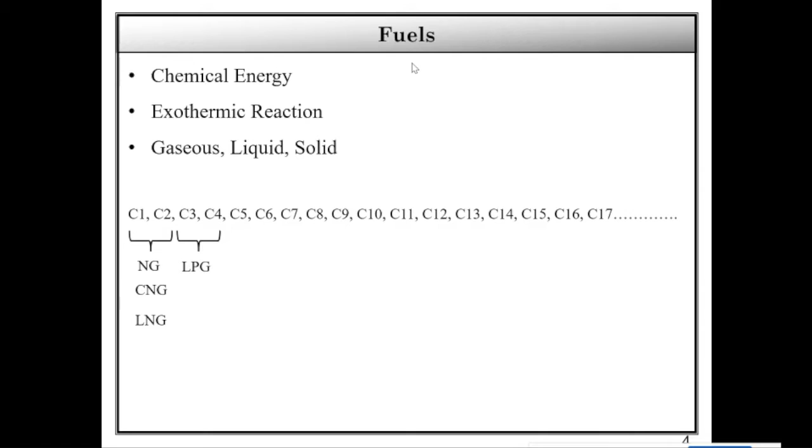C3 and C4 are easier to compress. Basically, it consumes less energy to convert into liquid form. And this C3 and C4 is popularly known as LPG, liquid petroleum gas, what we use at our houses.

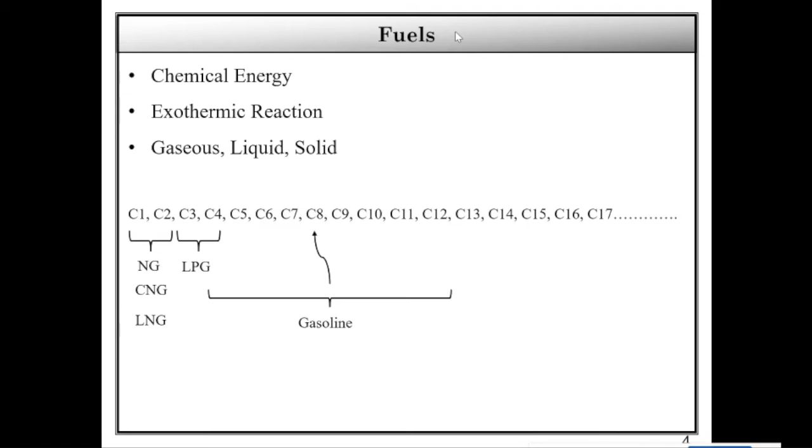And then gasoline. What is gasoline? Gasoline is basically the mixture of C5 to C12. Whatever liquid components are there from the hydrocarbon, this low molecular weight liquid component, these are basically the mixture. Majority of this gasoline consists of C7 and C8. Similarly, diesel and kerosene is the mixture of C10 and beyond.

However, the maximum portion of the diesel consists of C12, and kerosene consists of C10. So, in a nutshell, what I wanted to explain with this slide is that gasoline and diesel are not one single hydrocarbon. These fuels are basically mixtures of several different hydrocarbons. So it means these will not have a single boiling point. They have a varying boiling point depending on the composition.

So if somebody is producing this gasoline from an oil well in India, it may have some different composition. If you are importing gasoline from Saudi Arabia, that gasoline may have a different composition. So it is like that. There is no single boiling point for diesel and gasoline. It is basically the boiling range, which varies depending on the composition of the compounds.

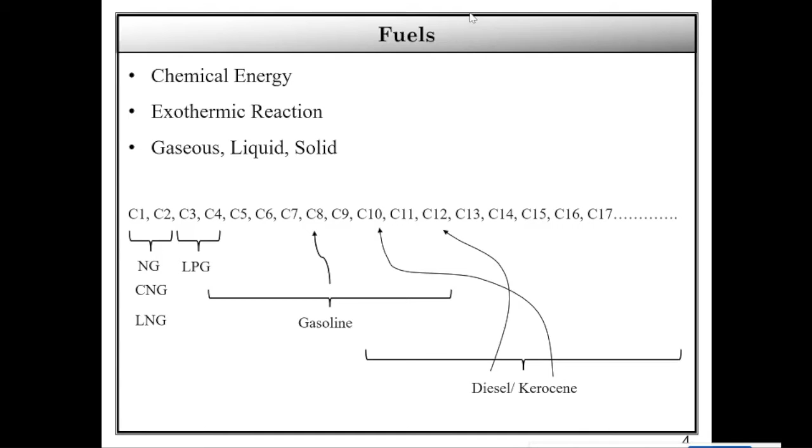Now I will quickly come to the diesel and gasoline engine. I hope most of you have already gone through diesel and gasoline engine combustion. So why do these two different engines come into the picture? Why can't we use just one engine, diesel or gasoline? Why do we need two different types of engines? This is mainly because of the different types of fuel.

Gasoline has two very important properties. One is the vaporization characteristics. Gasoline vaporizes very easily, and also its auto-ignition temperature is higher. Diesel, on the other hand, has very poor vaporization characteristics, and its auto-ignition temperature is lower. And therefore, gasoline fuel is very easily mixed with the air.

And therefore we observe that normally in the gasoline engine the fuel-air mixture preparation happens outside the combustion chamber, and in the diesel engine the fuel-air mixture preparation happens inside the combustion chamber. This is mainly because of the inherent property of the fuel. That is the main reason for adopting these two different technologies.

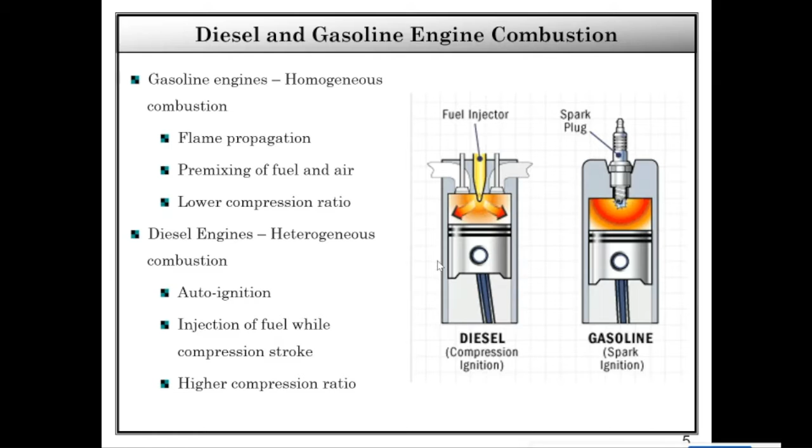In the gasoline engine, the combustion happens through the flame propagation phenomenon, and in the diesel engine, the combustion happens through the auto ignition phenomenon. In a gasoline engine, there is a source of ignition. In a diesel engine, there is no source of ignition. So the ignition happens due to auto ignition.

Okay, 4-stroke engine. This also you must have gone through earlier. When we call it a 4-stroke engine, it means the piston is basically traveling 4 times from TDC to BDC. In the 4-stroke SI engine, in the first diagram, number 4 is basically the fuel injector. It is a low pressure injector, and it is injecting the gasoline fuel before the combustion chamber. What happens is the fuel comes here at point 4, it mixes with the air, and the mixture enters into the combustion chamber.

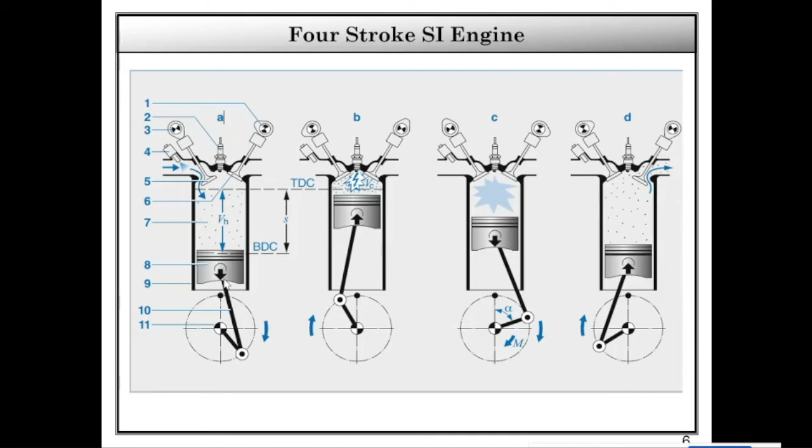Finally, the compression happens in the second diagram, the spark is initiated, and then the combustion starts. Flame propagation happens in that diagram. In the third diagram, the piston pushes down, the piston moves downward, and finally the exhaust stroke. I hope most of you are already aware of this 4-stroke SI engine. Similarly, how does the combustion basically happen in the SI engine and the CI engine?

On the top side of the slide there are two diagrams. One is showing the spark in the spark plug. That is the spark generation, and this spark generation basically acts as the initiation of the combustion phenomenon. Once this spark is generated, the ignition starts with the fuel-air mixture which is in proximity of this spark, and then this flame starts propagating towards the further portion of the combustion chamber. This is how the flame propagation phenomenon happens.

The second diagram does not belong to the SI engine. This belongs to the fuel injector. I am showing this because you should have some comparison between the SI and CI. In the SI engine, the left one shows the spark generation, and the combustion is happening because of the spark plug. On the right hand side, there is a fuel injector which injects the fuel in this manner, like a flower, and there are very small diesel fuel droplets spread over the combustion chamber. Due to the auto ignition temperature, it actually starts combustion.

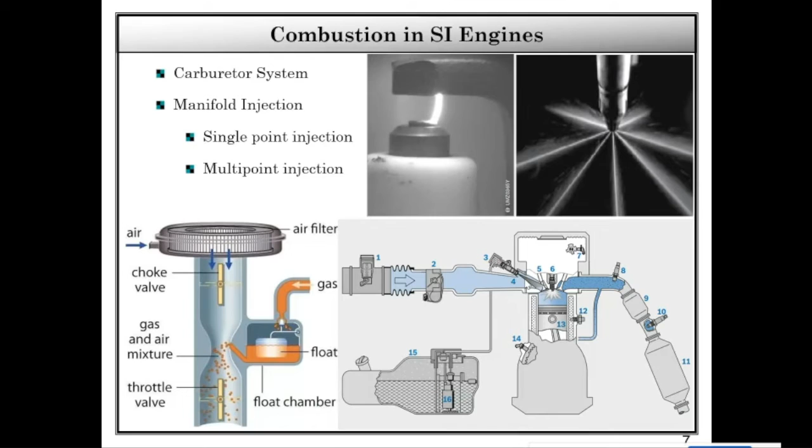Through this process, when the piston is about to reach the TDC position, auto ignition of the fuel happens, because the auto ignition temperature is lower for diesel fuel compared to gasoline fuel. So auto ignition happens quickly in diesel compared to gasoline. As soon as the auto ignition starts, the chemical energy of the fuel starts converting into thermal energy, and it is stored as thermal energy in the form of gases in the combustion chamber.

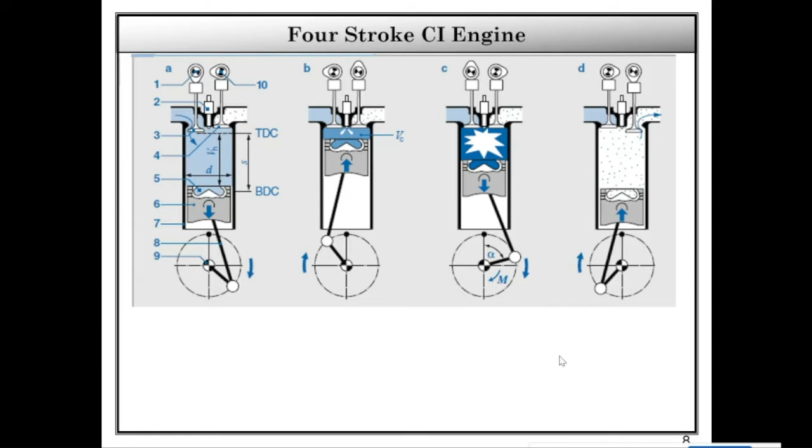Once this combustion happens, pressure develops inside the combustion chamber. It starts pushing the piston downward, and by this method the thermal energy is finally converted into the mechanical motion of the piston. This is how thermal energy is converted into mechanical energy. And finally, through the exhaust stroke, the combustion products escape the combustion chamber and it again comes back to the suction stroke.

So this is a representative diagram for the pressure trace. This diagram shows the 4-stroke pressure trace result, in which the blue block shows the suction stroke, TDC to BDC, the green block shows the compression stroke, the orange block shows the expansion stroke, and the yellow block shows the exhaust stroke. If you look at each of these strokes, you can see the pressure trace. The curve shows the in-cylinder pressure, how the pressure inside the combustion chamber varies.

You can also see where the start of injection is happening. Start of injection and start of combustion are both different phenomena. Start of injection means when you start injecting the fuel, and start of combustion is when the combustion starts. The time difference between the two phenomena is known as ignition delay. Sometimes we write it as ID also.

If you draw the corresponding heat release diagram, in the lower diagram you can see the typical heat release rate profile. The top diagram shows the pressure trace, meaning if you measure the in-cylinder pressure in the engine, this is the typical pressure trace, and the lower diagram shows the heat release rate. Whenever combustion of fuel happens inside the combustion chamber, it is not spontaneous. It takes some time, and there is a rate of heat release. The lower profile shows that rate of heat release. The heat release does not occur instantaneously; it takes some time, and therefore in terms of crank angle you can see there is a typical profile of this heat release rate.

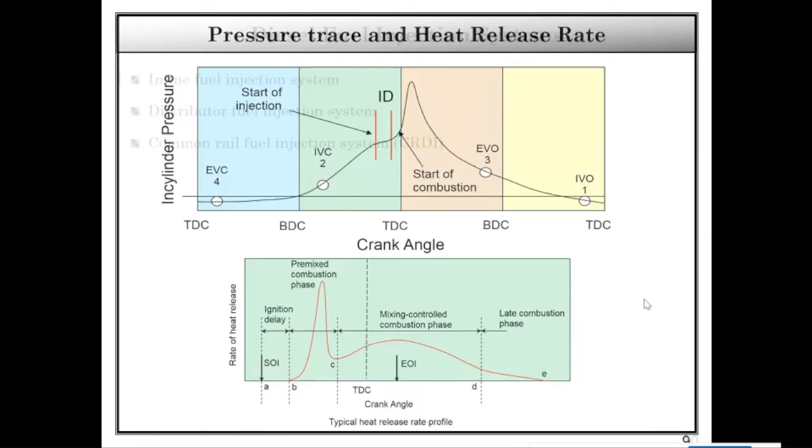So diesel. How does the diesel fuel injection system work? What are the different diesel fuel injection systems? One is the inline fuel injection system. The second one is the distributor fuel injection system. Until the 1990s, only these two types of fuel injection systems were famous: inline and distributor.

In the inline fuel injection system, you can see that there is a plunger and a cam. When the cam moves, this plunger moves up, and in this manner it compresses the fuel and opens the injector, and the fuel can be injected into the combustion chamber. Similarly, the distributor fuel system again has a plunger, but there are multiple cam arrangements. The size of the distributor fuel injection system is comparatively smaller than the inline fuel injection system. That is the only advantage. The other things, like the outlet fuel pressure, are the same in this case.

These two types, the inline and distributor fuel injection systems, were famous until Bharat Stage 3 norms, because manufacturers were able to fulfill the requirement up to Bharat Stage 3. However, beyond Bharat Stage 3, there are certain emission norms which have to be met, and therefore manufacturers have to adopt newer technology. So nowadays in any diesel engine satisfying Bharat Stage 4 or Bharat Stage 6 emission norms, you will observe they are equipped with a common rail fuel injection system, the CRDI system.

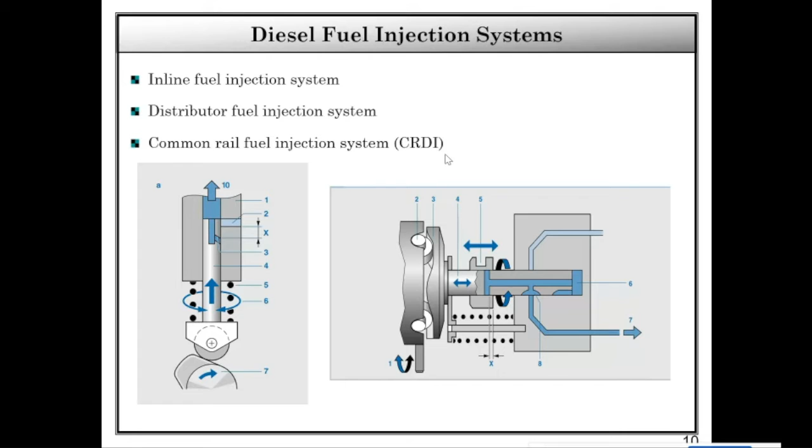The CRDI system is not a new technology. However, it is more costly and more sophisticated. Earlier it was not adopted because manufacturers wanted to reduce the overall cost of the vehicle, and the CRDI system is a little costlier and more complicated compared to the inline and distributor fuel systems. But nowadays every diesel manufacturer has to adopt the common rail fuel injection system because they have to meet the emission criteria. So what is the common rail fuel injection system?

You can see this layout, where there is a low pressure pump in the bottom-most corner. The low pressure pump, the fuel pump, is situated in the fuel tank of the vehicle. It sucks the fuel and sends it through the filter to the high pressure pump. There is a metering unit which meters the amount of fuel. The low pressure pump compresses the fuel to around 10 bar, and this 10 bar fuel is supplied to the high pressure pump, which compresses the fuel to about 1000 to 1500 bar.

And 1500 bar is too high. This is a very high pressure. For example, the air pressure we are sustaining over our heads is approximately 1 bar. So the high pressure pump generates approximately 1000 to 1500 bar, and nowadays some advanced CRDI systems generate fuel pressure up to 2000 bar also. This high pressure fuel goes to the

common rail. On the right hand side, you can see the common rail. In this common rail, 4 injectors are connected. Four or more injectors can be connected, and these individual injectors are normally connected to the engine cylinders. In this manner, there are 2 major advantages. One is that you are able to inject the fuel at much higher pressure. Beyond 1000 bar pressure, you are able to inject the fuel.

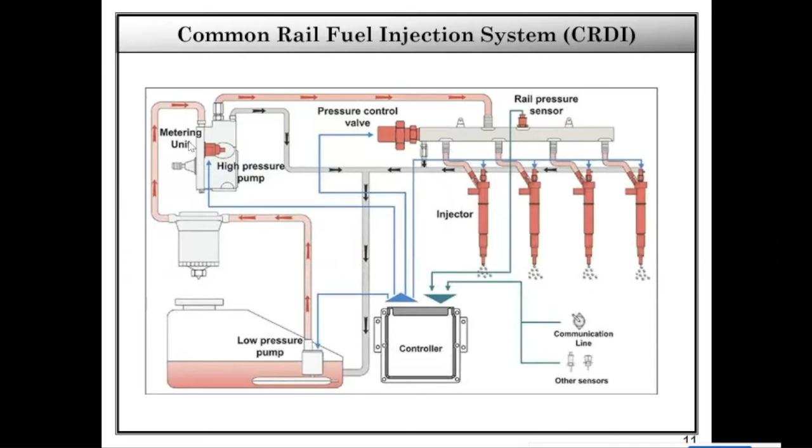Okay, now this high pressure pump, you have seen this high pressure pump in this diagram. How does this high pressure pump actually work? So you see on the left hand side, this basically shows a typical structure of the high pressure pump, and this model belongs to the Bosch high pressure pump. Bosch is a very well known firm for the manufacture of this common rail fuel injection system. So in this you see there is a cam type of lobe in the center, and there are three plungers surrounding it.

So this central lobe is basically eccentric to the center of the circle. Okay, so because of the eccentricity of this lobe, it actually pushes the piston while it rotates. And in this manner, the fuel compresses above the plunger, and the high pressure fuel can be delivered to the common rail.

And this diagram basically shows the common rail system, where you can see the two sensors, number 5 and number 2, and number 4 is basically the high pressure fuel, which is coming from this high pressure pump, which is shown above. Okay, so from this high pressure pump, the fuel is coming to number 4 in the lower diagram, and number 6 is going to the individual injectors in order to supply the fuel. Number 3 is basically the return line. The return line is provided because if some amount of excess fuel is there, it can be transferred back to the fuel tank.

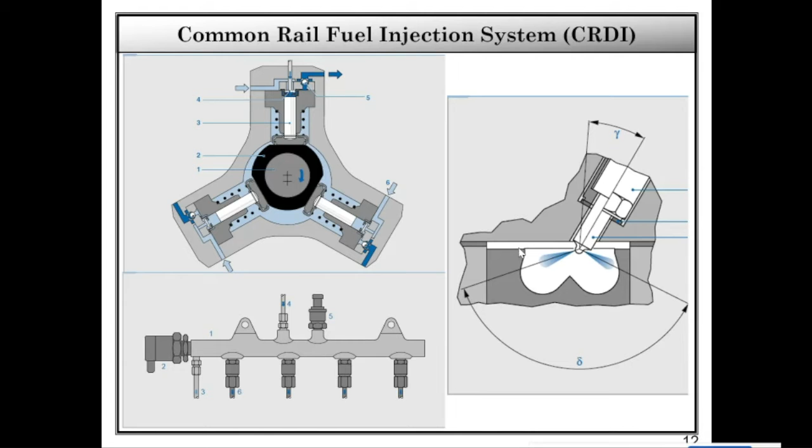Okay, so the fuel injector. How is the fuel injector installed inside the diesel engine? So you see there are various parameters by which we actually define the position of the fuel injector inside the combustion chamber. We can place the fuel injector at a certain angle, and there is also the fuel injection angle, which is called the fuel spray cone angle. So there are various parameters we need to define before installing the fuel injector inside the combustion chamber.

Okay, now nowadays the IC engine is not limited to mechanical devices only. You must be wondering that there are many components which are electronically controlled in the IC engine. It is not just the engine or some mechanical components. In the last 10 to 15 years, the IC engine has changed drastically, and it is basically controlled by an ECU, electronic control unit. So this electronic control unit is basically the brain of the IC engine, and it takes feedback from several sensors and gives commands to many actuators.

Okay, so an ECU is there in every vehicle. Whenever you open the bonnet of any car, some of you must have a car also, if you look inside the bonnet, you see that there are many mechanical components. But in addition to that, there are many sensors and many actuators. And in one of the corners there must be an ECU somewhere. The ECU is hidden somewhere, but there is always an ECU nowadays with BS6 norm vehicles. BS6 and BS4 vehicles always consist of this ECU, electronic control unit, and it is installed somewhere in the engine. So what is the function of this ECU?

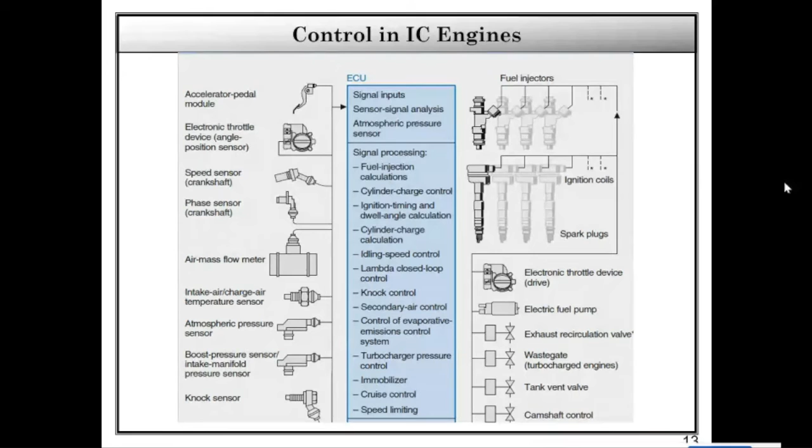Okay. So the electronic control unit is basically an IC circuit, and it acts like a brain for the IC engine nowadays. I can suggest some books for reading about the details of this. So ECU programming is one of the major tasks nowadays, because you have to feed the programming in order to the number of tests you conduct in the IC engine.

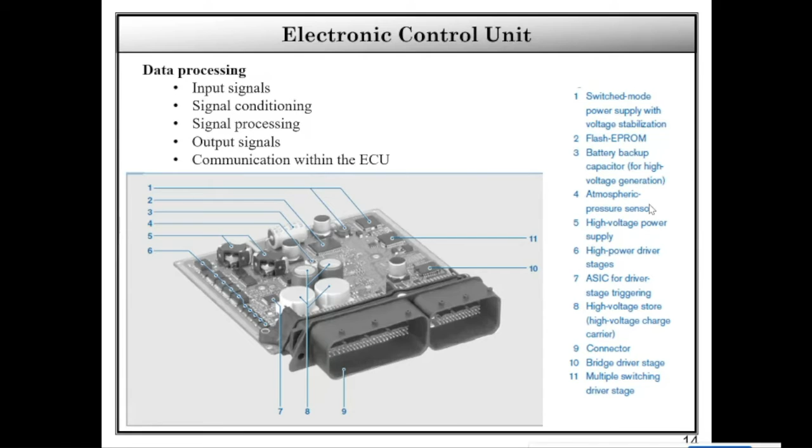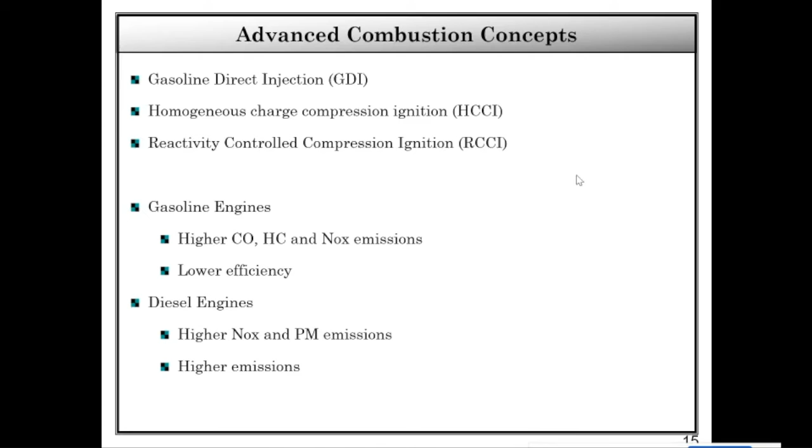So gasoline direct injection is basically a method where you inject the gasoline directly into the combustion chamber. As I explained, in the carburetor or manifold system, you basically inject the gasoline fuel in the manifold, or you mix it in the carburetor. Okay, and then the mixture enters the combustion chamber. But in gasoline direct injection, a high pressure gasoline injector is installed in the combustion chamber itself. Okay, and only air enters the combustion chamber, and the gasoline is injected inside the combustion chamber.

So there are two modes of this gasoline direct injection. One is the homogeneous combustion process, and the second one is the stratified charge combustion process. Homogeneous combustion process means, in a conventional SI engine, the fuel air ratio has to be maintained at the stoichiometric ratio. Okay, I mean, if you do not have a proper ratio of fuel and air in the SI engine, the combustion cannot start, because of the low concentration of gasoline in the combustion chamber.

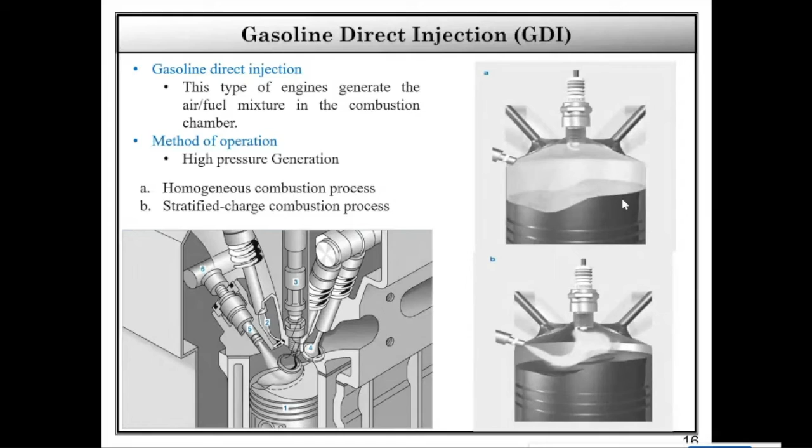Okay, however, in gasoline direct injection, the fuel air ratio is actually lower. Okay, so whatever fuel is required for the required power production, only that amount of fuel is injected in gasoline direct injection. So the homogeneous charge combustion system is one of the techniques in the GDI system where fuel is injected with a lower fuel air ratio, but in a homogeneous manner throughout the combustion chamber.

While in the stratified charge combustion process, the fuel is injected in a certain direction. In the lower diagram, you can see the fuel is injected in a certain direction, and because of the specific piston design, you can see there is a deflector in the piston which is directing the fuel which is injected. Okay, that fuel is directed right towards the spark plug. So when it is directed towards the spark plug, the space closer to the spark plug is full of fuel. Okay, that is rich in fuel. So the combustion starts there.

Okay. However, when the flame propagation starts in a later stage of the piston movement, the amount of fuel is less. So in this manner, you generate most of the power when it is required, and towards the end of the piston movement, less power is produced. Okay. So in this manner, the GDI engine is very beneficial for fuel economy. Okay, so this basically acts like a diesel engine also.

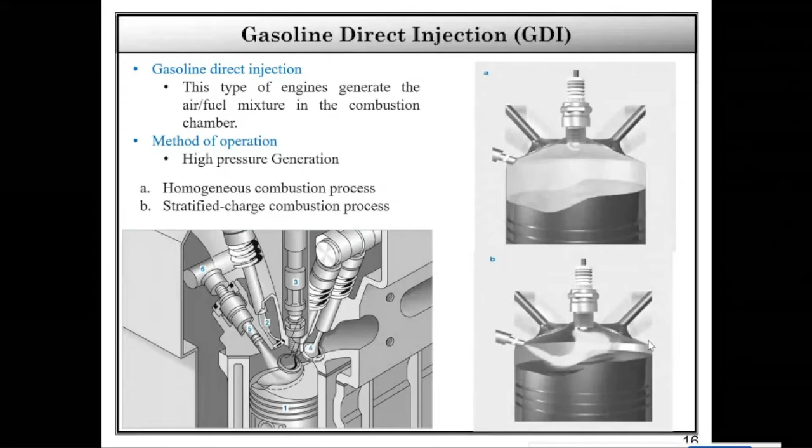Stratified charge. Strata means layers. In this stratified charge combustion, you inject the fuel in such a manner that layers of different fuel concentration form inside the combustion chamber, so the useful power can be maximized.

Similarly, homogeneous charge compression ignition. In the gasoline engine, like I explained, flame propagation happens. In the diesel engine, the fuel injection happens and due to auto ignition, the combustion happens. However, in the HCCI engine, it is a very low temperature combustion phenomenon, and you inject the fuel before it enters the combustion chamber, but at a relatively higher compression ratio. In this manner, the combustion is more homogeneous.

The only problem with the HCCI engine is that sometimes you need high load conditions. This is one of the limitations: the HCCI engine cannot be operated at higher engine load conditions. It is very good for low and medium load conditions, but for higher load conditions it is not very suitable, and that research is still going on.

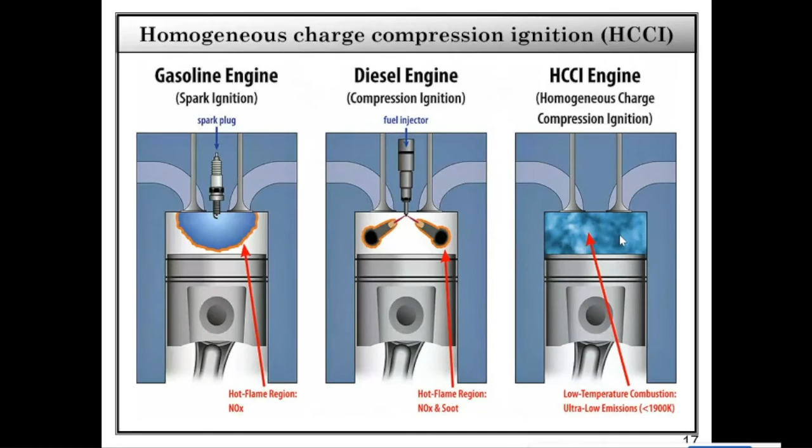Diesel is infamous for particulate and NOx emissions. However, gasoline combustion is very good and is only infamous for HC emissions. The particulate control is very difficult, but the gaseous control is relatively easier. The diesel engine generated particulate is very harmful and sometimes difficult to control. However, the gasoline engine generates HC, CO, and NOx, which are relatively easier to control because they are in gaseous form, and there are devices available to control those emissions.

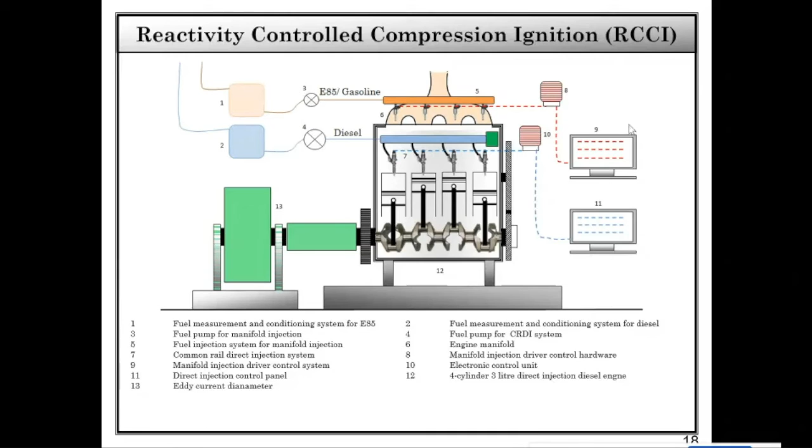So reactivity controlled combustion is basically the combination of these two concepts. Sometimes we also call it dual fuel injection, where you are injecting two different types of fuels. In a conventional diesel engine, whatever fuel injection system is there, that is there. But in addition to that, we install another fuel injection system in the manifold for gasoline-like fuels. By having the proper ratio of these two fuels, we can optimize the emission level in the tailpipe, and the combustion phenomena can also be optimized. That is one of the research areas nowadays, and people are still working on this solution.

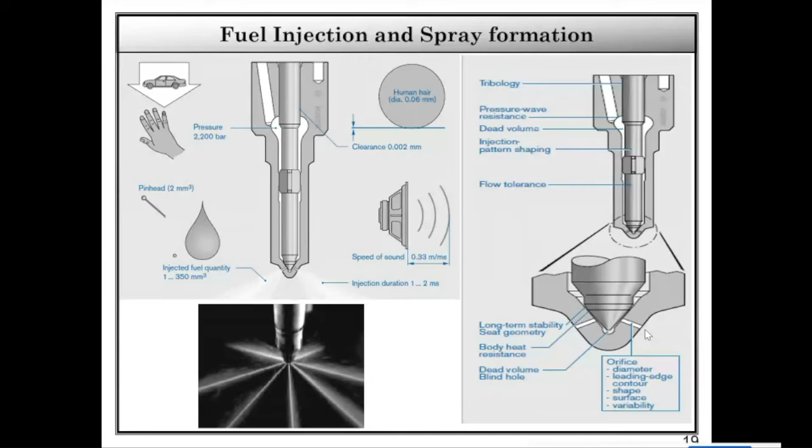On the right hand side, you can see the zoomed figure of the injector nozzle, where you can see the orifice. Sometimes we call it the injector nozzle and orifice; both are the same. The orifice diameter is in the range of microns. The smaller the orifice, the more the droplet size is minimized, and that is better for mixing. So injector design is a very important phenomenon, and people do research in this area also.

Okay, now pollutant formation and after treatment devices. So you see, basically there are two techniques. I have maybe 10-15 minutes more. So till now I explained what the different combustion phenomena are in brief, and how pollution reduction and optimized combustion can be achieved by adopting these techniques.

Okay, one of the important points in the discussion we had till this point is that it basically indicates the control of emission through in-cylinder modification. Like you want to modify the combustion phenomena, or modify the injector, or have an advanced fuel injection system like the common rail fuel injection system. By adopting all those techniques, you are having some kind of control by modifying the engine devices, in or around the combustion chamber, and this gives you some control over the emission.

However, there are other things. As a result of the combustion, there is still a lot of pollutant that comes into the tailpipe, like hydrocarbon emission, CO emission, NOx emission, and particulate emission. These are the main pollutant components. Even with in-cylinder control techniques, we still need some kind of control in the tailpipe, and therefore we install some kind of devices in the tailpipe. These devices are known as after treatment devices.

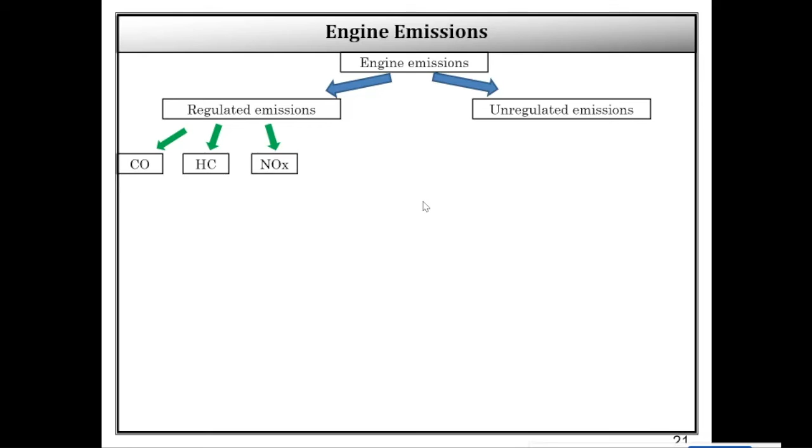Regarding engine emissions, you can see that they are basically divided into two different categories. One is the regulated emissions, and the second is the unregulated emissions. Regulated emissions consist of CO, HC, NOx, and PM. CO means carbon monoxide, HC means hydrocarbon, NOx means oxides of nitrogen, and PM means particulate matter. This particulate matter can further be divided into elemental carbon, organic carbon, trace metals, sulfates, nitrates, etc.

Out of this, the organic carbon and the trace metals are well known as carcinogenic, and they cause diseases like cancer. So these are not very good for health. Therefore there are certain emission regulations in order to limit CO, HC, NOx, and PM, so the emission can be minimized. This is basically the purpose of having the Bharat Stage norms.

Apart from this regulated emission, there are many unregulated emissions also, which mainly come from HC and OC, hydrocarbon and organic carbon, because hydrocarbon is not a single compound; it is a mixture of different hydrocarbons. Similarly, organic carbon is also a mixture of several different hydrocarbons. So this also acts as unregulated emission, and this basically results in benzene, toluene, xylene, polyaromatic hydrocarbons, methane, saturated and unsaturated hydrocarbons, aldehydes, and alcohols, etc. These are very harmful and toxic to human beings, and have to be controlled. However, there is no regulation to control these compounds individually till now.

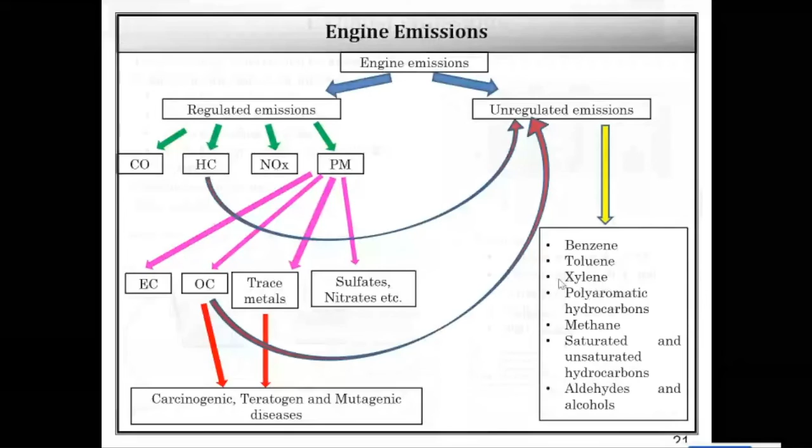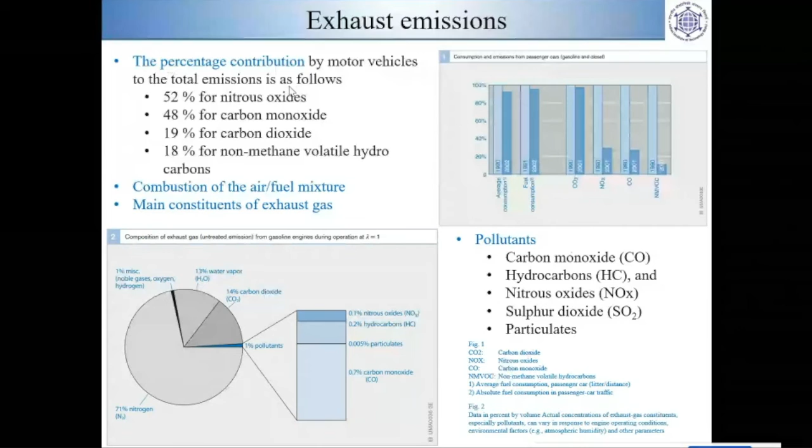Exhaust emissions: these are some of the data available on the internet about the contribution of the automobile sector in the total emission, and how the pollutant formation happens. Here in the diesel engine, you can see there are sprays, so there is a fuel rich region and a fuel lean region. In the rich region there is deficiency of oxygen, and in the lean region there is deficiency of fuel, between the two sprays. So the combustion is not homogeneous. When the combustion is happening, it basically happens where the proper fuel air mixture is available.

So it is not homogeneous combustion; it is basically heterogeneous combustion. In contrast, in an SI engine it is homogeneous combustion because the fuel-air mixture is homogeneous there. That is why we call diesel combustion heterogeneous combustion, because the combustion is not happening homogeneously throughout the combustion chamber. It depends on the local fuel-air ratio inside the combustion chamber.

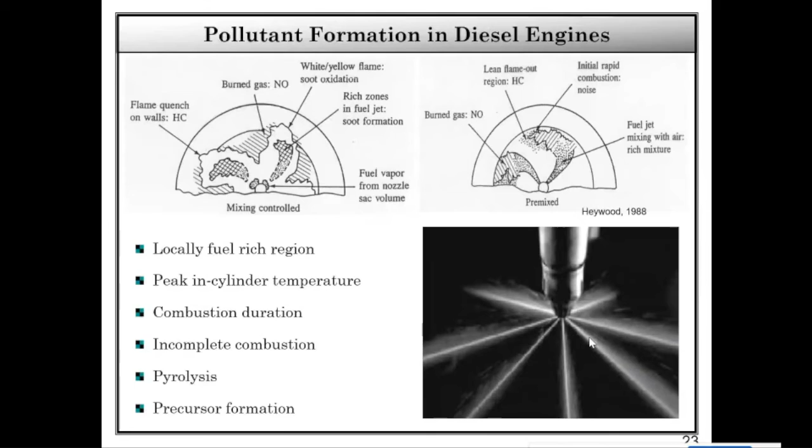Pollutant formation. NOx formation is happening mainly because of three reasons: thermal NOx, fuel NOx, and prompt NOx. Thermal NOx: whenever air enters the combustion chamber, nitrogen is inherently present with the air. This nitrogen starts reacting with the oxygen at very high temperature inside the combustion chamber, and they eventually form NO and NO2. And this is basically the NOx emission.

Some of the NOx emission forms due to impurities of nitrogen present in the fuel, and some of the NOx forms due to the cyanide radical route during the flame propagation, or mostly during the flame propagation. So this prompt NOx is mainly dominating in gasoline combustion.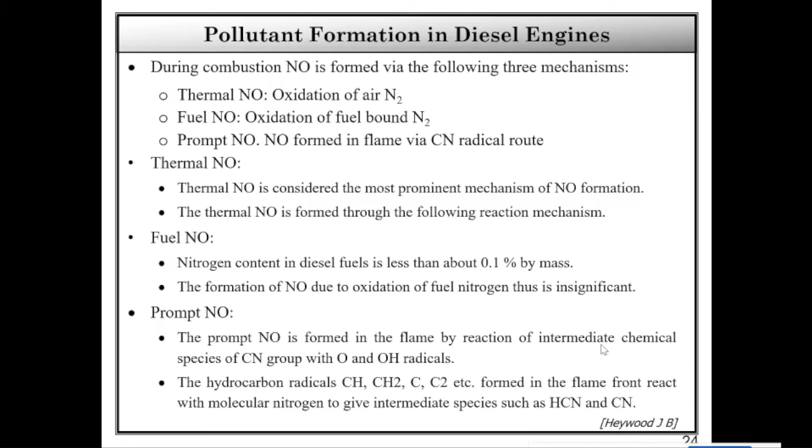So how does the formation of this diesel particulate happen? Diesel particulate is one of the major problems related to the diesel engine. Whatever black smoke you see coming out of the tailpipe, this black smoke is not gases. These are very tiny particles which are suspended in the exhaust. Whatever gaseous emissions are coming, you cannot see that. What you are seeing, the black smoke, are very tiny particles. Those are called diesel particles, and these particles are very harmful to human beings.

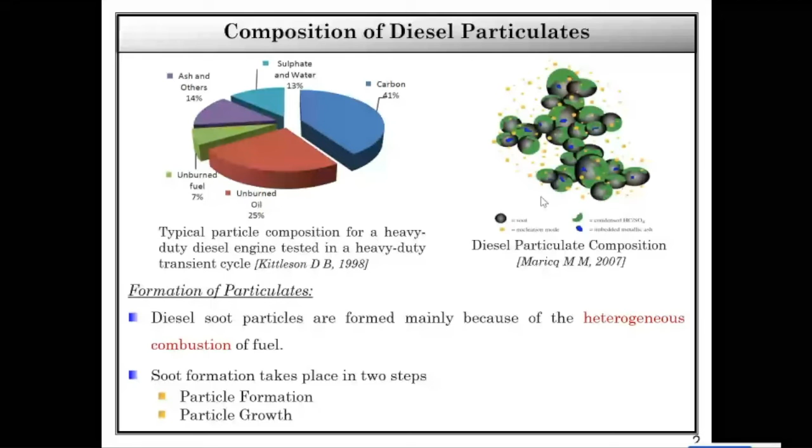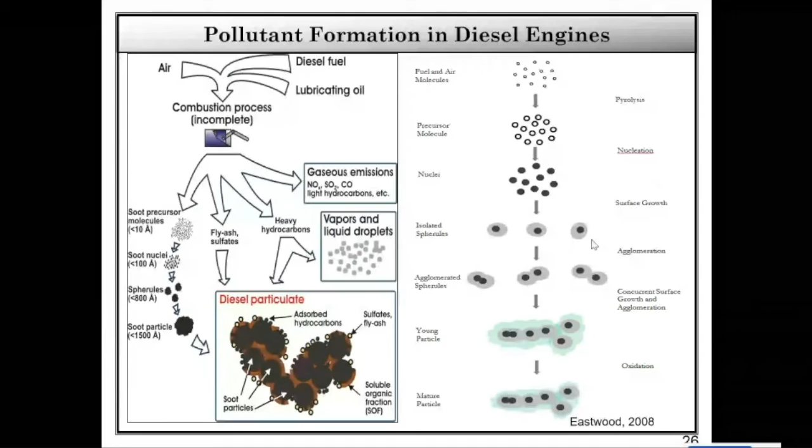This is the structure of these particles. They are very small, in nanometers, and because of their very small size they suspend in the air and make the color of the exhaust black. These particulates can be filtered out by some devices. How does the formation of diesel particulate take place? There is a certain procedure inside the combustion chamber: pyrolysis happens, followed by nucleation, then surface growth, agglomeration, and finally oxidation. So the mature particle can be formed inside the combustion chamber, and the whole diesel particulate phenomenon takes place in a few milliseconds.

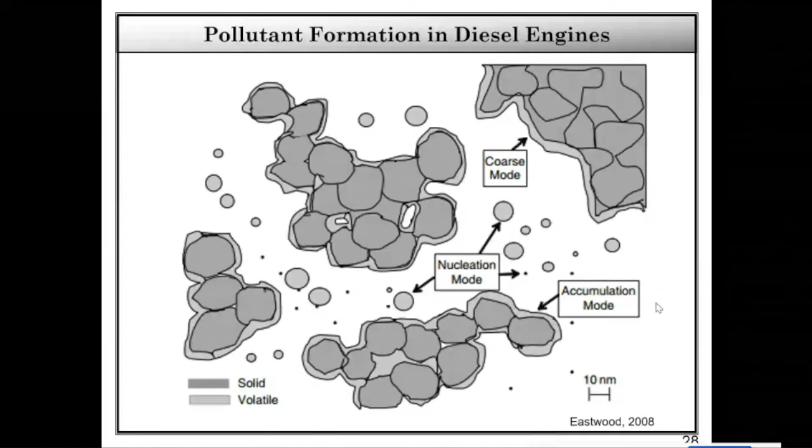Particulate formation: nuclei mode particles, accumulation mode particles, and coarse mode particles. The nuclei mode particles nucleate and accumulate to form accumulation mode particles, and the accumulation mode particles coagulate and form the coarse mode particles.

Now some health discussion, like PM 2.5 and PM 10. It is known that PM 10 can penetrate your nasal cavity, and PM 2.5 is able to penetrate the respiratory zone. It can cross the alveoli and enter into the bloodstream. These PM 2.5 particles can be retained in your bloodstream, sitting in the cells for a long time, and after some time they can start mutation in the cells, which is one of the probable reasons for carcinogenic disease. So these particulates need to be controlled.

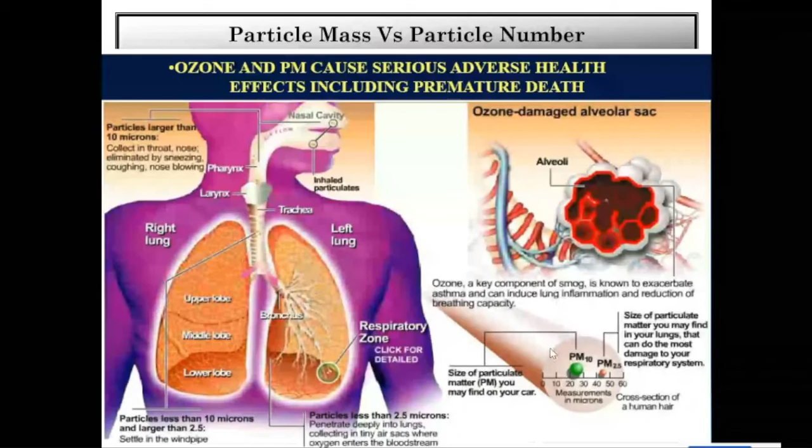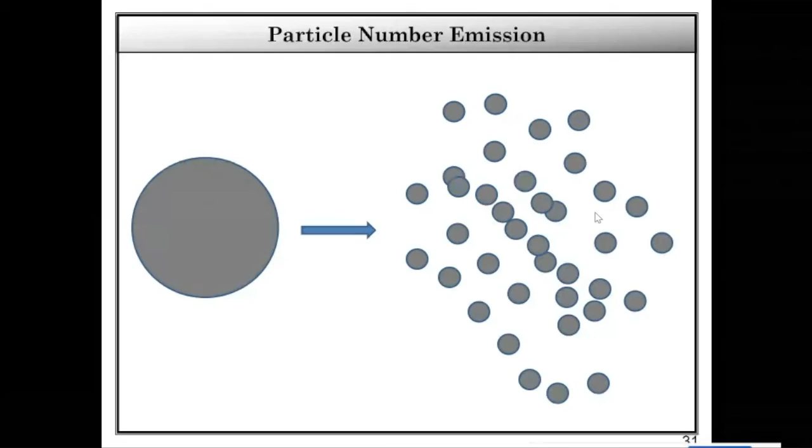Okay, particle number emission is another problem, because in the advanced injection system the PM emission has been reduced drastically, but the number emission has been increased. If you divide one bigger particle into several small particles, there are two things. One is that the surface area will increase, and the second is that these small particles can easily penetrate into the deeper parts of the body, through the lungs. So these two drawbacks are there with the advanced injection system.

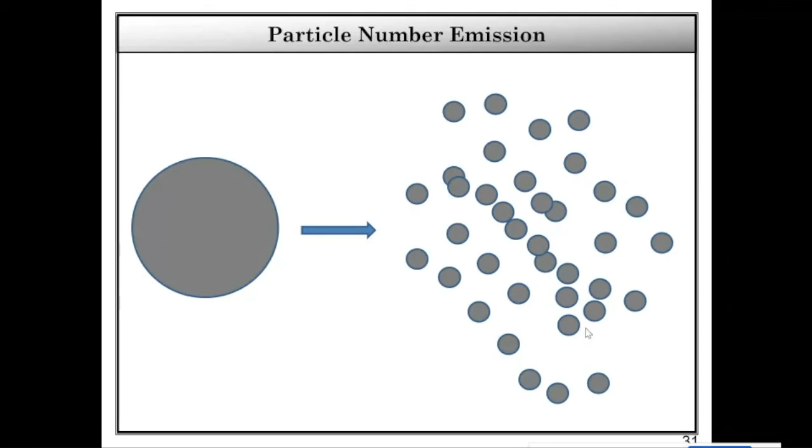Diesel engine emission and its control. Like we discussed for the gasoline engine and diesel engine, whatever aftertreatment devices are there, the gaseous emissions are easier to control because of the easily installed emission devices. However, particulate sometimes becomes a difficult challenge, and therefore the diesel engine is infamous for particulate emission. In the gasoline engine there is hardly any particle emission; it primarily comes from the diesel engine. So we will mainly discuss the aftertreatment devices for the diesel engine here.

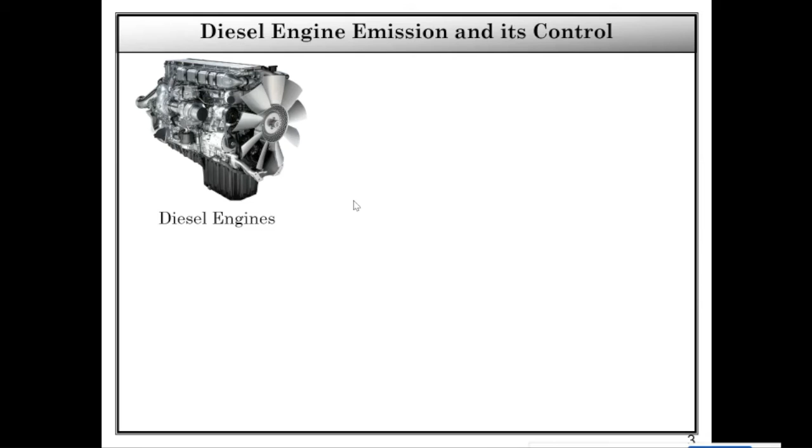In the diesel engine there are two main challenges: PM, particulate matter, and NOx, and these can be controlled by active control systems. Active control systems, like I explained in the beginning of the slides, include advanced fuel injection system, advanced combustion system, and design of the injector nozzle. Those are known as active techniques, which you do in and around the engine. However, there is another technique known as the passive technique.

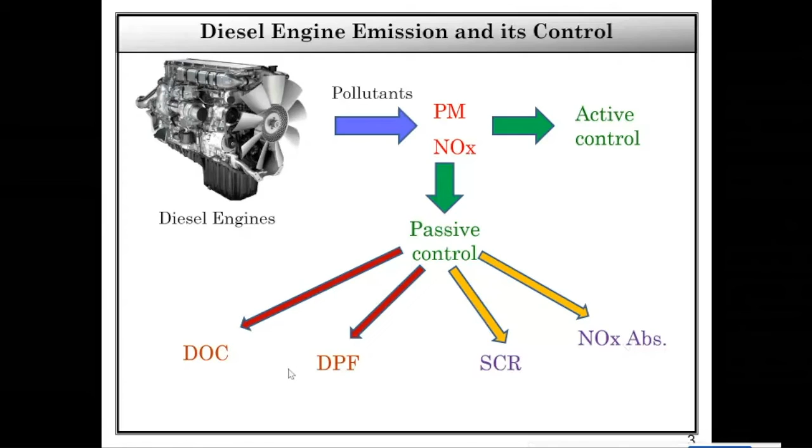Passive technique means whatever formation is coming out of the engine, let it come to the tailpipe, and in the tailpipe we install some devices. Those are called aftertreatment devices, and they can reduce the particulate matter. These devices are primarily known as DOC, DPF, SCR, and NOx absorber. DOC is diesel oxidation catalyst, DPF is diesel particulate filter, SCR is selective catalytic reduction, and the NOx absorber is for NO and NO2. These are the four popular devices under the passive control technique. Now we will briefly discuss these devices.

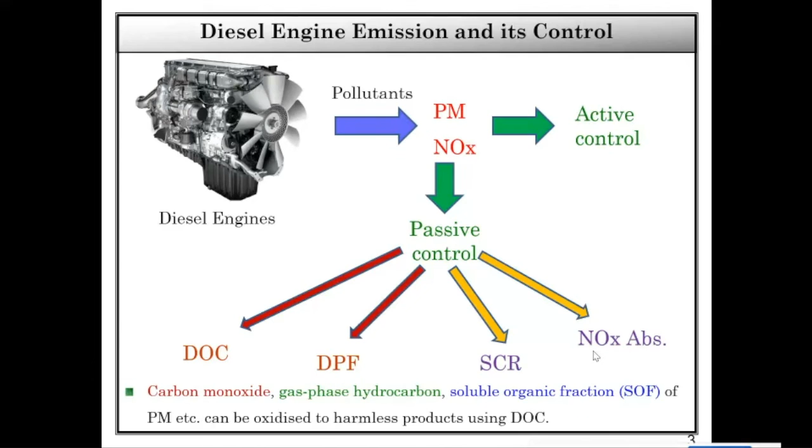We will start with DOC. The DOC is very effective in oxidizing the HC and CO emissions, hydrocarbon and carbon monoxide, and it oxidizes HC and CO into CO2 and H2O. One thing we should always remember is that when we talk about an internal combustion engine, the aim is to have the maximum amount of CO2 and H2O in the tailpipe. That is the fundamental thing.

One can say that CO2 is harmful to the environment, but ICE experts always prefer as high a CO2 concentration in the exhaust as possible, and a higher concentration of moisture. The reason is that whatever HC and CO emission or hydrocarbon fuel is there should convert into CO2, because if HC and CO are released in the environment, they are more harmful than CO2. However, the overall CO2 should be controlled, and for that, engine downsizing is one of the solutions: we should use the engine with the minimum required power.

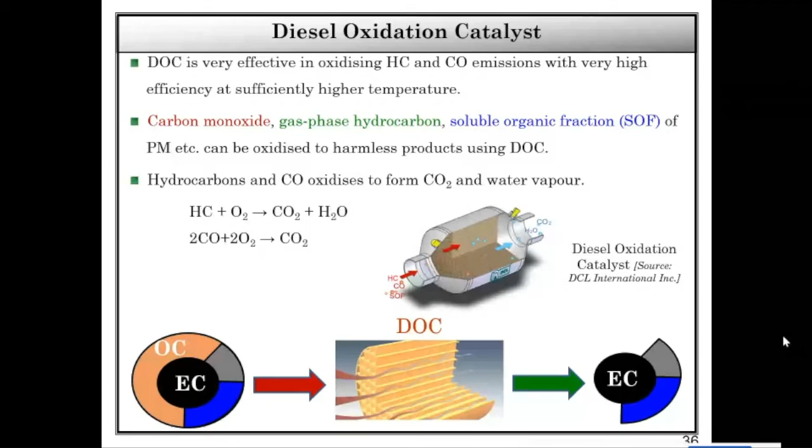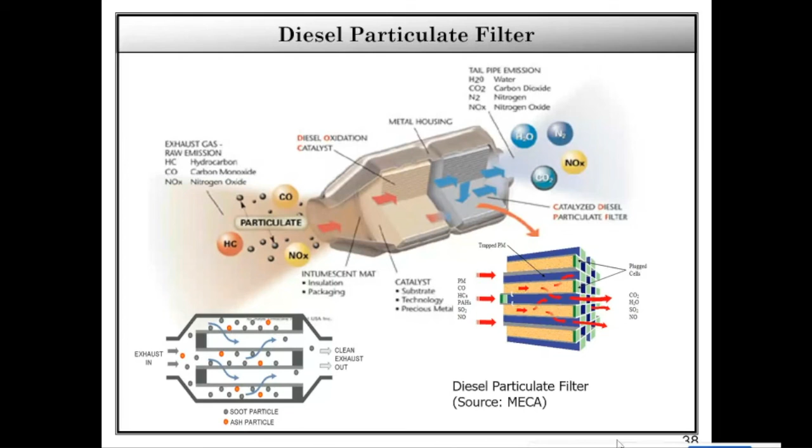Gases can pass through this perforated surface, but the particles cannot. Particles get trapped in these channels. So this is how the particles can be filtered out by using the diesel particulate filter. This diesel particulate filter is one of the devices which is very effective, and it can filter out more than 90% of the particles.

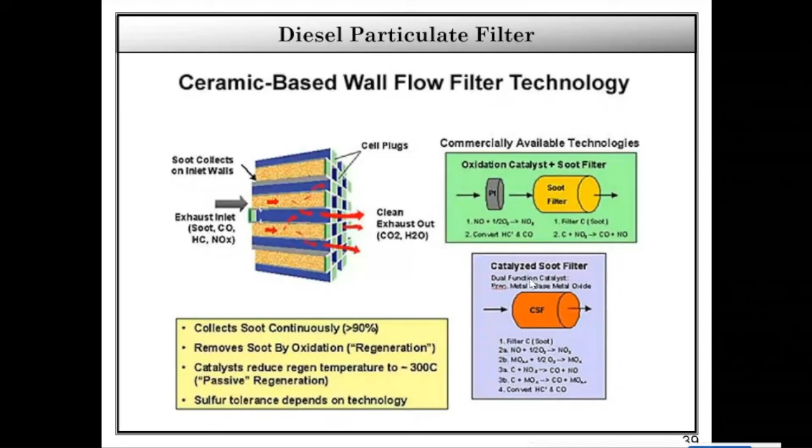Okay, selective catalytic reduction. This is basically to control the NOx emission, NO and NO2. It has four major components. One is the oxidation catalyst, which converts the NO into NO2 and also converts the HC and CO into H2O and CO2. Then in the second stage there is a urea injection, and after the urea injection there is a hydrolysis catalyst, which converts the urea into ammonia.

In the hydrolysis catalyst, the urea converts into ammonia, and this ammonia passes through the SCR catalyst, where NO and NO2 are converted into N2, into nitrogen. Nitrogen is not harmful. In this manner the N2 is released into the environment. After that there is again one small oxidation catalyst which converts the remaining ammonia into N2. So this is how the SCR catalyst works.

Because of the huge size of this SCR catalyst, this NOx control device is mainly used in truck engines. If you keenly observe BS6 norm truck engines nowadays, like Bharat Benz or Ashok Leyland, if it is a Bharat Stage 6 compatible truck, then you can see there is a urea tank. In addition to the fuel tank, there is another tank, that is the urea tank. You can see it sometimes on the road, and that urea is injected in the SCR catalyst.

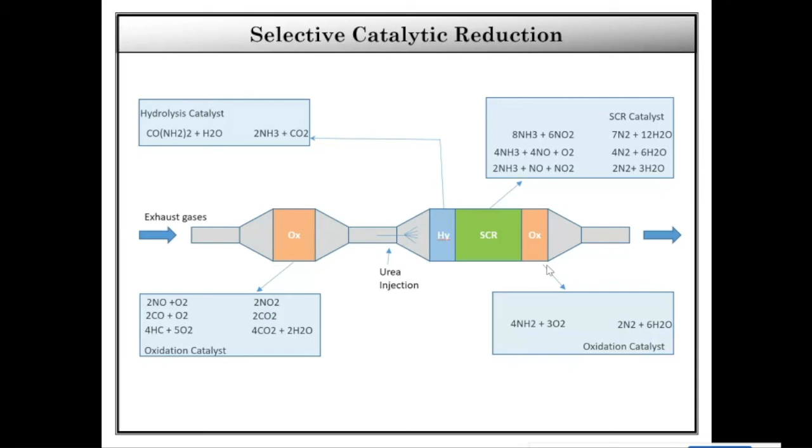However, the SCR is not possible in smaller engines, so there is an alternative for that, called the NOx Absorber. The NOx Absorber is a smaller device like DOC, and it acts on the leaner and richer conditions, basically the storage and reduction conditions. When the engine is running under lean condition, it stores the NOx, and when it is running at rich condition, it emits nitrogen and ammonia. If ammonia is released, then this ammonia has to be controlled by a supplementary oxidation catalyst.

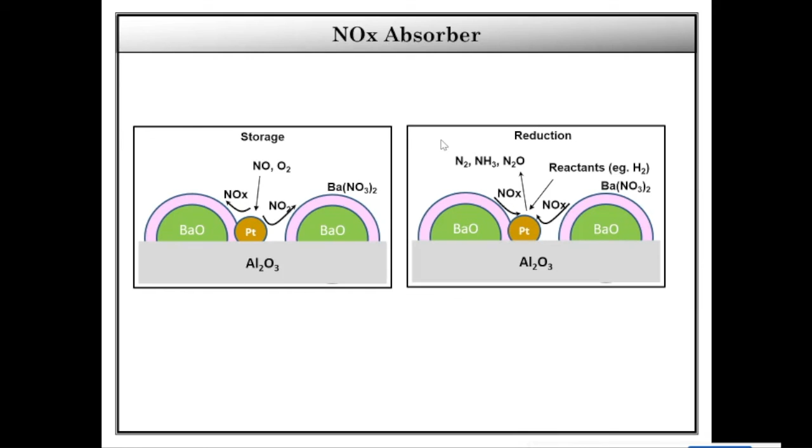I have covered the IC engine part, some of the advances in the IC engine, and some of the advances in these emission control devices, aftertreatment devices. There is one more topic I have, but there is a time limitation, so I would like to stop here. We can cover biofuels for IC engine, which is also one of the very major points, but due to the time constraint, I would like to discuss this in another session.

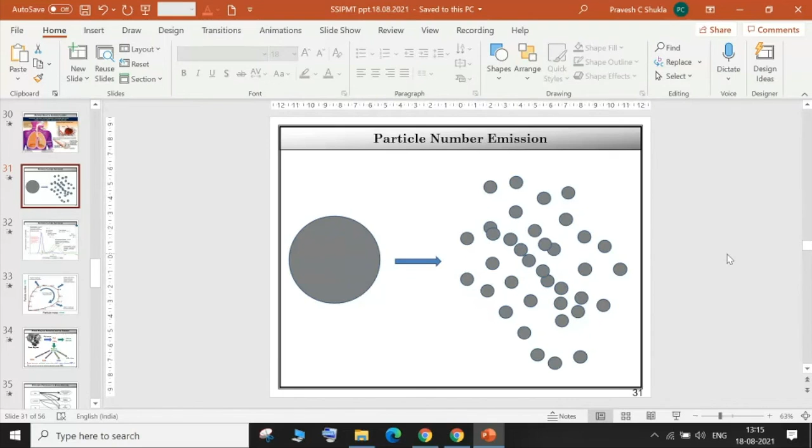Thank you, sir. There is one more question from Mr. Manish Sahu. He's asking, what are the differences between BS4 and BS6 and why is there a huge price difference between them?

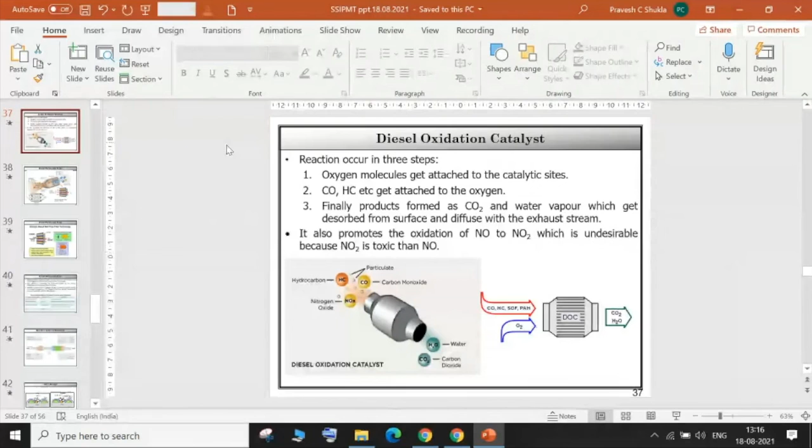Yes, okay. For example, I just showed this DPF and DOC. I purchased my car with BS4 compliance, which is fulfilling the BS4 norms, and it has an oxidation catalyst only. Sorry, it has an oxidation catalyst only for the gasoline engine, not the diesel oxidation catalyst. There is some difference between the diesel oxidation catalyst and the normal oxidation catalyst for the gasoline engine. So a BS4 engine has one oxidation catalyst, and a BS6 engine also has more advanced emission control techniques like DPF.

Suppose a truck is coming in the market. If you buy a truck in 2014, which is BS4 compliant, it has only a diesel oxidation catalyst. And in 2020, if you buy a truck that is BS6 compliant, there are limits you have to meet: what is the particle concentration in the tailpipe, and what is the CO concentration in the tailpipe. That limit has been drastically reduced, so in order to meet it, we have to control these emission levels more rigorously.

When I say more rigorously, it means you have to install more of these devices. So for 2020 truck models, in addition to DOC, you have the DPF, the diesel particulate filter, also. When you are adding an extra component in the vehicle, obviously it is going to cost you more. These DPF and DOC are normally coated with noble metals like platinum, palladium, and rhodium, so when you use these devices, the cost of the vehicle increases, because these devices cost a lot.

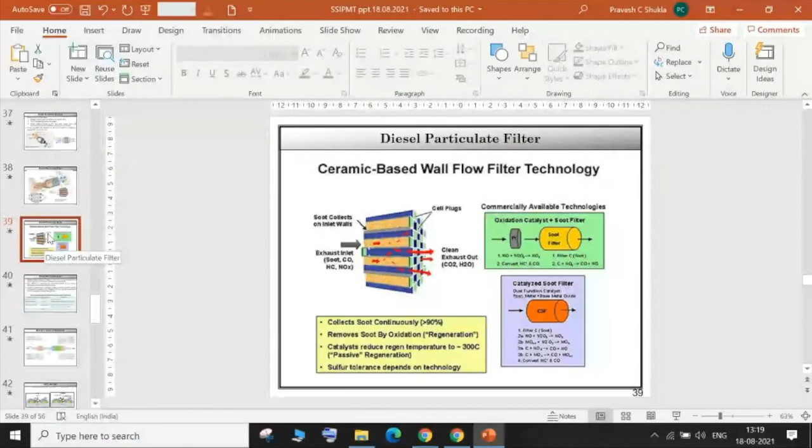Yes, sir. Okay. Very good afternoon to you, sir. Somebody is asking for the email ID, so it is Pravesh@itbhilai.ac.in. It is available on the website also.